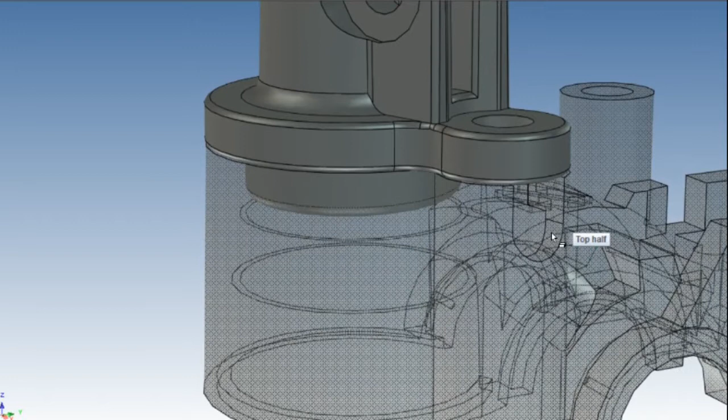Updates on the Nimble version 1.1. Our customers have come back with a few areas of improvement for the Nimble. One of them is this hole here, which is used to clear out the Nimble inside without having to open it up. Just blow air in it and the same hole at the bottom will shoot the chaff out. Not that there's that much chaff because the customized hob doesn't generate it, but okay.

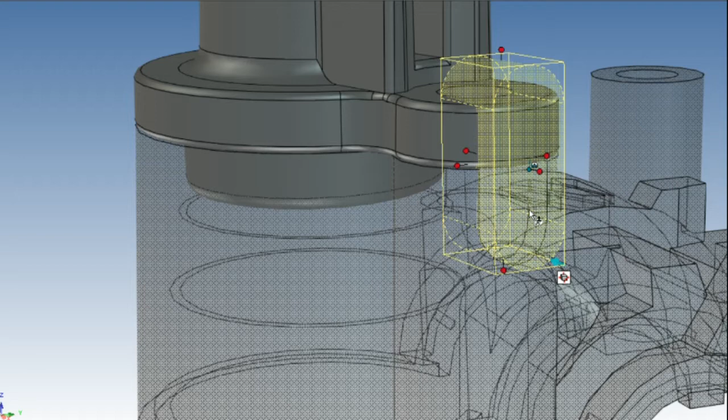It makes the column a little bit too weak. When people tighten the bolt that holds the Nimble together, they quite often tighten it a bit too much, and because there's a gap here, it kind of bends open. The other thing that we need to fix is this little lip here. This little lip holds the sleeve clamp, which is this whole thing, in place, but it's a little bit too small. So we'll have to increase that in size, and I want to add 2 more.

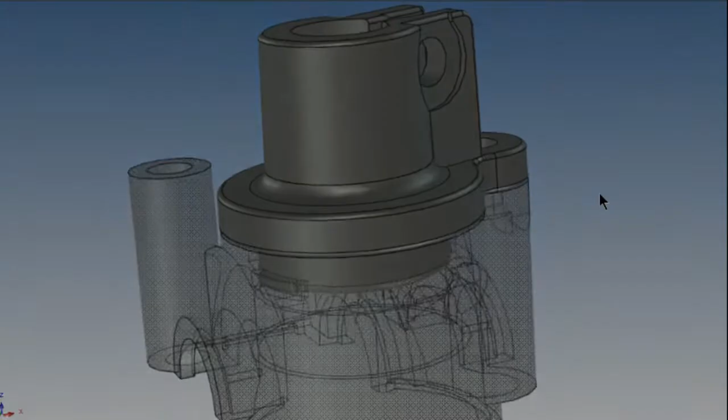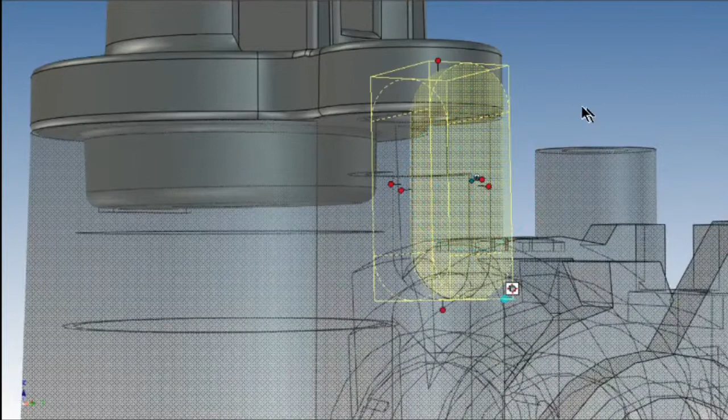Improving the opening here is simple. Just drag it down a little bit. Say 2.5. And also the hole itself is now too big, so we can reduce that in size a little bit. Now let's move it down a little bit further. Round about here. Yeah, that looks nice. Okay, that was easy. Now let's do the lip.

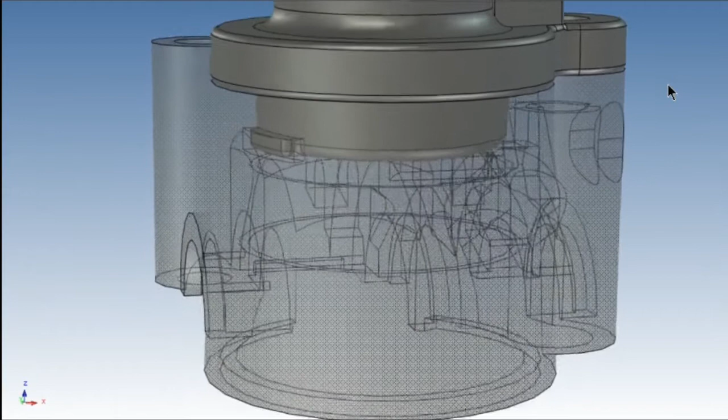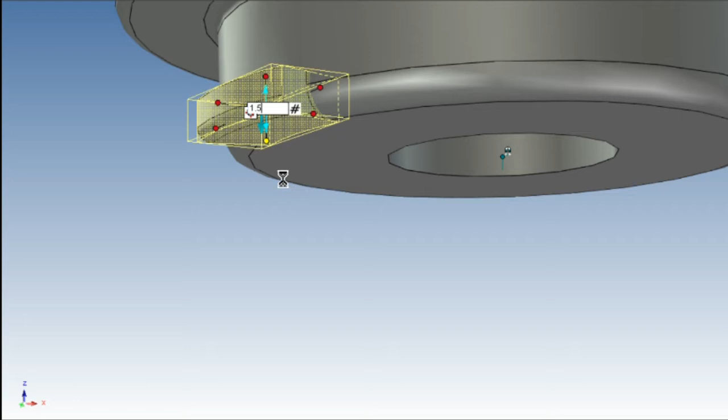First of all, the lip is too small, so let's remove this and remove the fillets as well, because they slow down the design work. I'll leave this one in place because I think we can use that. Okay, the lip is 0.85 millimeters tall. Let's make that 1.5. That's better. And let's make it a bit deeper as well to give it a little bit more meat.

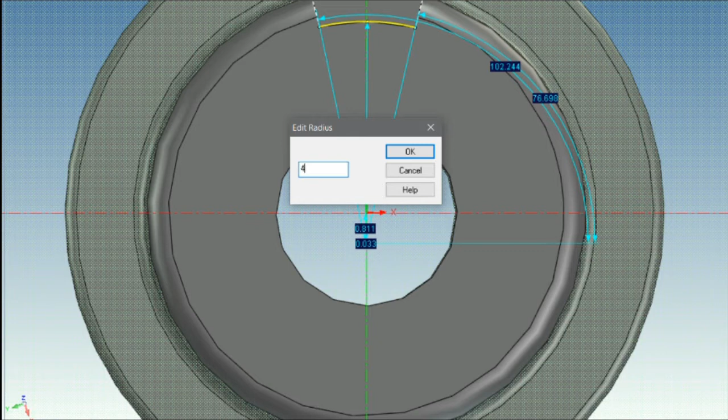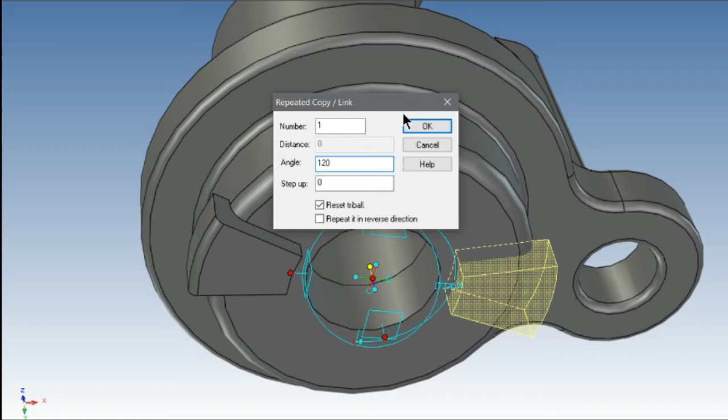The radius is 5.96, what a wonderful number. Let's make it 4. Might be a bit too big, but we'll see. Okay, now let's make 2 copies. We thought of doing just one on the other side here, but that wouldn't work because then it's only held in 2 places and it's a little bit weaker in the Y direction, so to speak. So let's just make 3 in total.

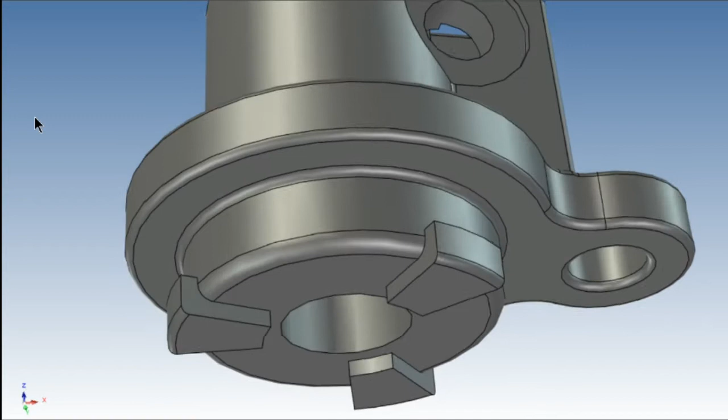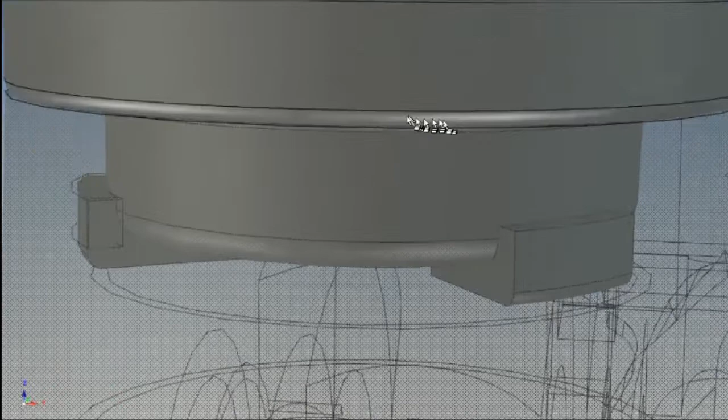There you go. Now add that little blend. What's the blend? 0.3. Okay. Add them to these 2. And there you go. Well, that was easy. Now we have to do the housing. Let's have a look. As you can see, the little groove is now not deep enough anymore, of course. And I need 3 because there's none here. Okay. So let's work on that.

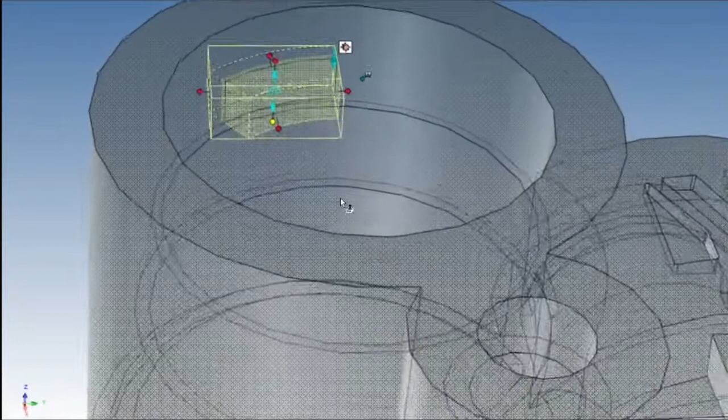This was the groove, the lip was 1.85. This is 1, so we need a little bit of space at the bottom. Makes sense. So I'll make this 1.6. Okay. And also I need 3. So I'll just copy 3. Perfect. 3 little grooves for the lip. Let's have a look. Yeah, perfect.

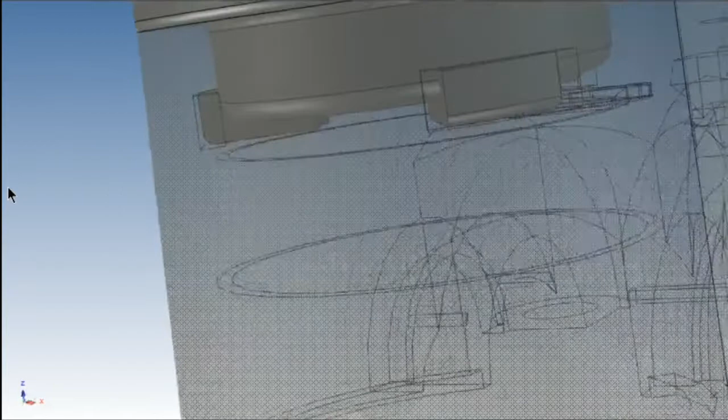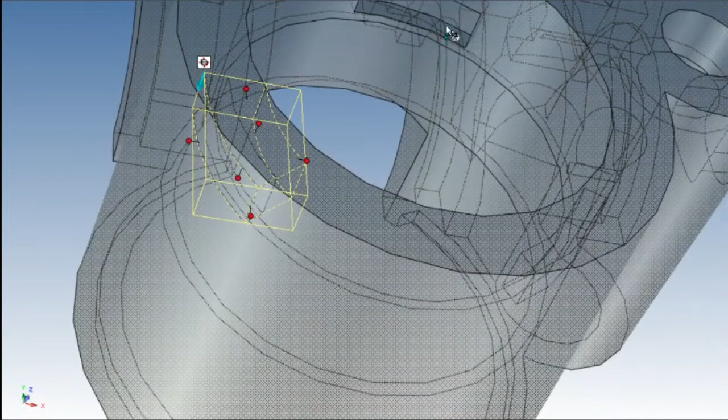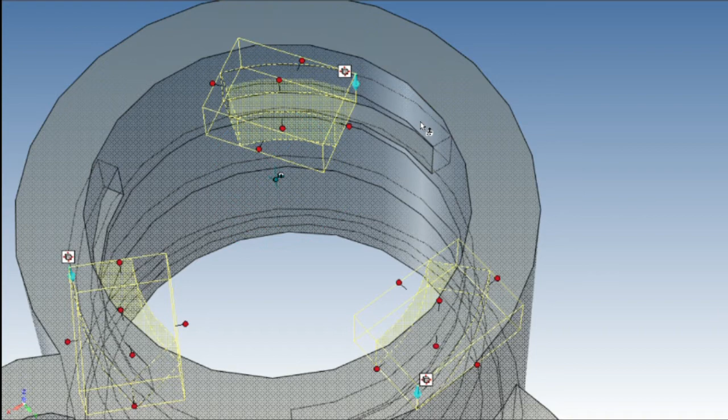Fits. Ha! Of course, now you can't remove the sleeve clamp or insert the sleeve clamp to begin with. So we need to make another groove that goes all the way to the top so you can rotate it in. So we suppress this again. We select all three of these grooves, and we rotate, there's the block, something like that, 35 degrees. Okay, and of course this slot has to go all the way to the top.

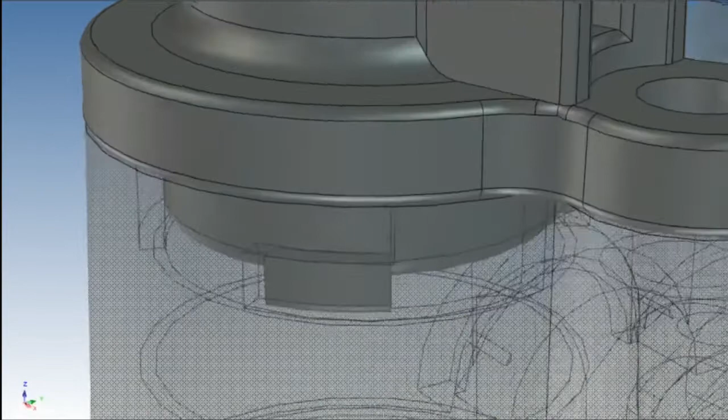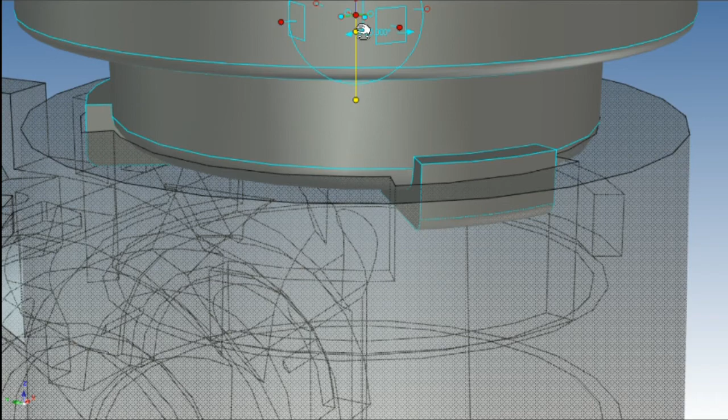So there you have it. Let's have a look. Sleeve clamp fits. Now let's rotate it. Did 35 degrees. And let's move it 35 degrees just to see. And you see that it indeed clears the groove. The groove was a bit too wide, but okay, I'll tweak that. And I can move it up, and it actually comes out. And also we can see that there's a little gap here, so there's enough space for it to move up and down. Okay, so that was that. Kind of easy.

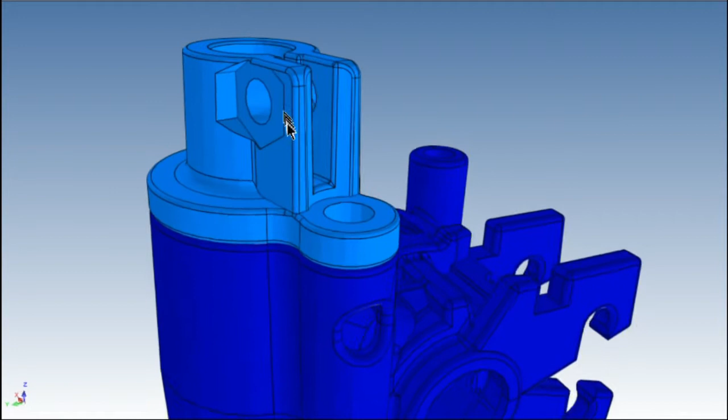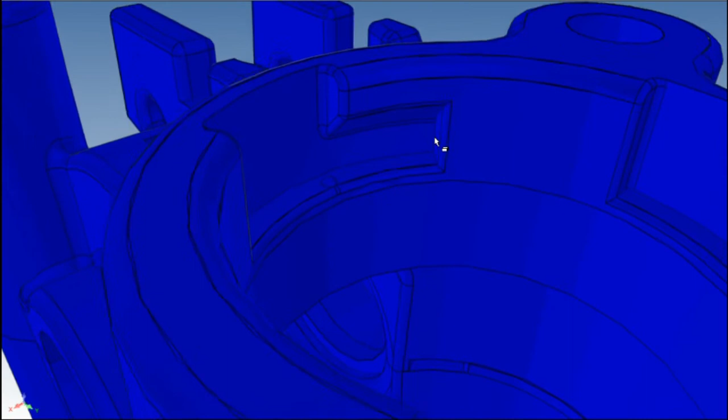Okay, so this is the production version, and we've made a few changes. One, I've made this all nice rounded and so forth. I've added a hexagon shape to the sleeve clamp so that the nut is held in place automatically. Also, let's move this. Here are the grooves that we cut into it, with nice rounded edges and so forth, and I made a little nubbin, as you can see, a little drop, so to speak, to lock the sleeve clamp in once it is in place.

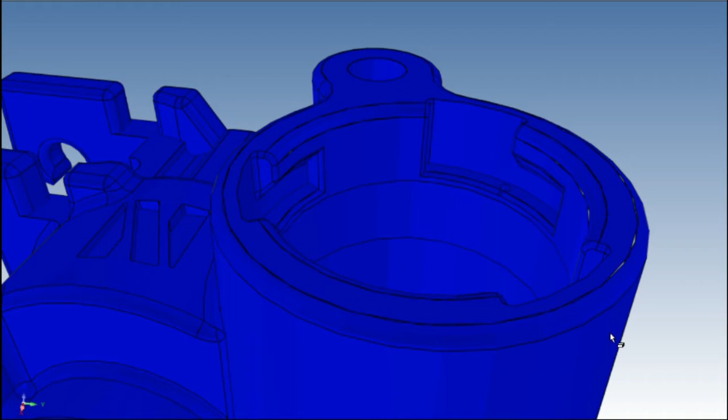I made this cutout. I made a stamp basically. If I click on this, you'll see that this is the stamp. So I don't have to recreate this cutout every single time. I just copy and paste the stamp in, and then use Boolean to subtract the stamp from the housing, and we've got everything, including all the fillets and the little nubbin and everything. So that's what the housing looked like.

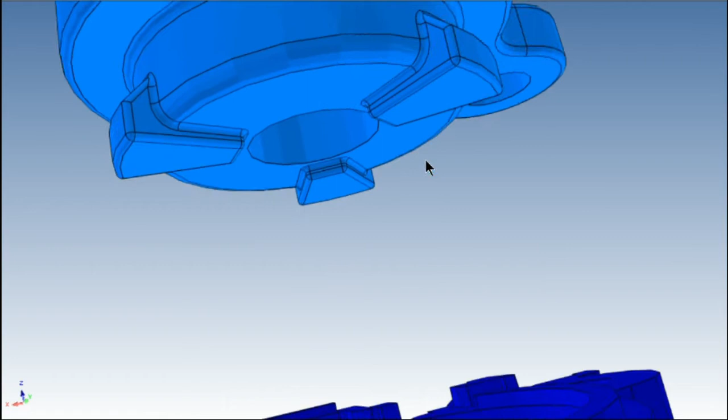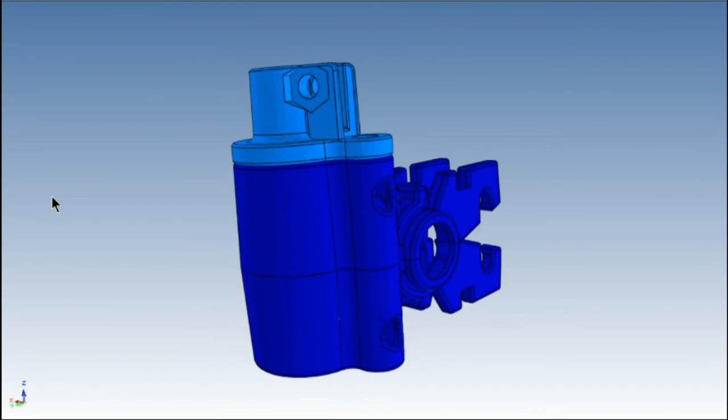Now let's have a look at the sleeve clamp itself. You see that it's a little bit more shaped now, and also I put a slight angle on it here so that this shape is FDM printable. So for instance, if you want to use an adapter to screw the housing into, then that would work. So there you have it. Nimble version 1.1, the latched Nimble.